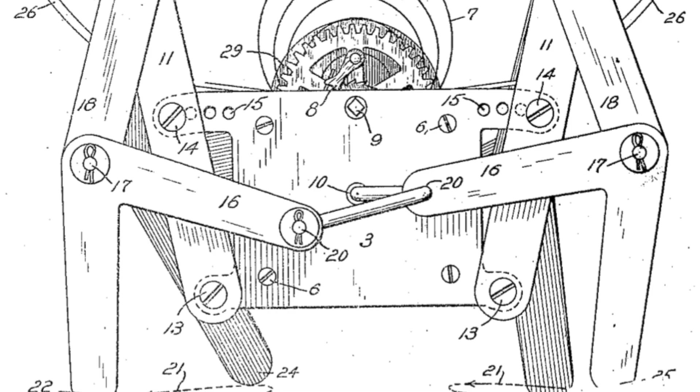Welcome back to part 2 of the video. In this step, we're gonna assemble everything in SolidWorks. So let's open up SolidWorks and do File, New Assembly. Let's start out with our base first. So, base. In this case, mine's a cat.

Let's also insert our crank, ternary link, and the binary link. Binary link, crank, ternary link. Just put them out here for now.

Now we take a look at our Geogebra file to see where all the links go. But since you made the base based on the Geogebra file, it should show up when you show the sketch on the base. So you want to go to the base and show sketch. So it's this. These lines I created previously. You can also see this is where the wheel goes. So we just insert our parts based on these locations.

So let's do the crank first. I'll just hide the sketch for now. So we put our wheel hubs here, and this connects to the other side of the crank. And the crank on both sides needs to be 180 degrees out of phase. And we use the wheel hubs to lock onto the brass tube, so the rotation will be translated onto the other side with the crank with the wheel hub as well.

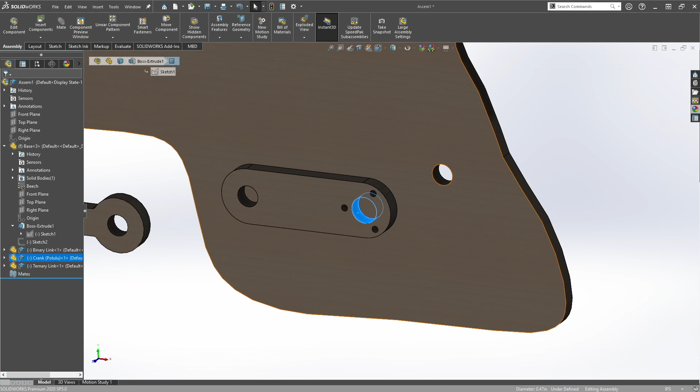So we are using wheel hubs from Pololu, and then the brass tube is 0.25 inches in diameter. So it's these wheel hubs here, 0.25 inches in diameter. Now the 6mm one is for the motor, because the shaft on the motor is 6mm. So for this one, since this is where the brass tube goes, we're going to use 0.25.

Now these hubs will attach to the crank here. So you would do a mate. Let's do a concentric mate. And then also a coincident mate. Just like that. Now these holes have to align to the wheel hub where the M3 screws go.

Let's mate that for the crank. So I select this surface, mate, select where the holes are on the wheel hubs, so they match. And that's it. That's your wheel hub and the crank. And the wheel hubs are threaded, so the screws will just secure on nicely.

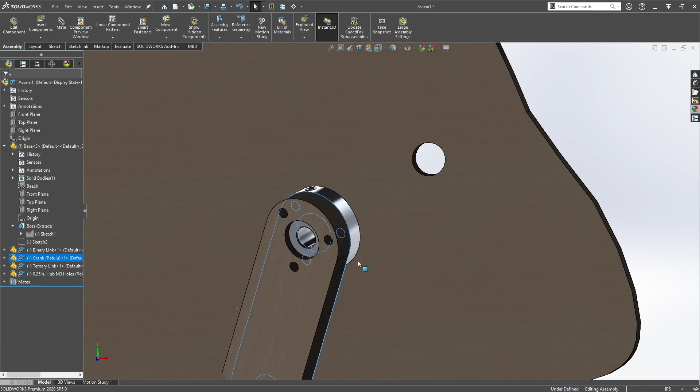Now we want to mate the crank to the circle here. There's two ways of mating. The first way, that's what we went over. You use mate using the mate selection here, and then just select concentric. There's also another method, which is a bit faster.

So what you would do is hold down your Alt key on your keyboard, and then you would drag what you want to mate. So I want to mate this circle to this circle. So holding your Alt key, you drag, and you should see like a paperclip icon on your mouse. And just drag it where you want to mate, and then it'll automatically know, oh, you want a concentric mate. And that's just a really quick way of doing it instead of going through the mate tree.

Now we want to mate the other links to the base. So you know this binary link, according to our Geogebra sketch, this one goes here, and this triangle goes here. So this joint here mates with this joint. Let's double check if that's right.

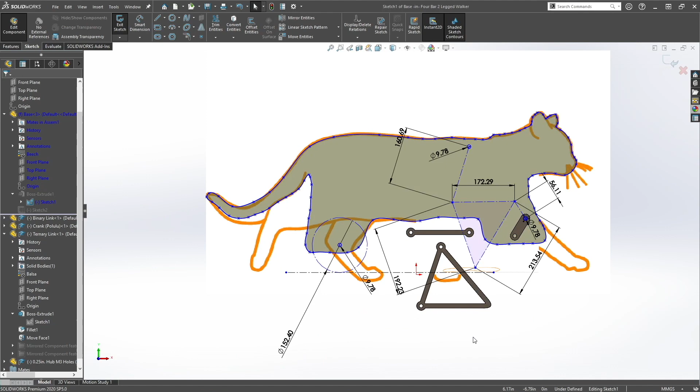Okay, so we know for sure based on that dimension there, this joint mates with this joint. So this joint must mate with that joint. Again, just refer back to your Geogebra file. It might be different from mine. So again, you will use the shortcut to mate this. Hold down Alt key. Do that.

And then let's mate this link here. And then finally, let's link this all the way back up to the base here. Let's just double check. I think I missed this one. There we go.

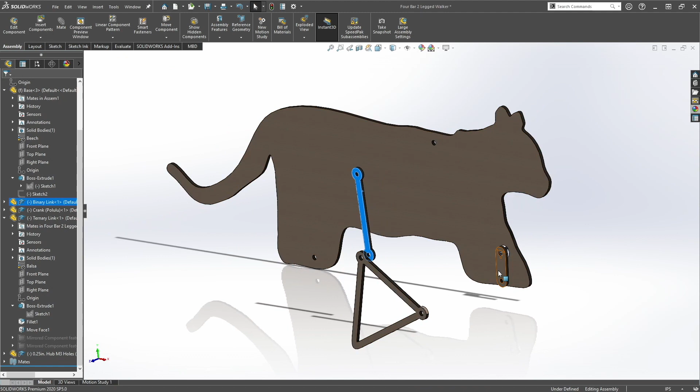So now you want to start mating it so it actually represents a walker, because now we're just testing it to see if the walking pattern and everything we designed is correct. I would say this part is one of the difficult parts, figuring out the spacings between the links, because you can have it here, here, or here. But for this one, we're just going to keep it simple.

We're just going to put the ternary link on the outside, the crank, and the binary link on the same plane. The way you join these links together is using a brass tube in the middle, bushings on the inside, and then shaft collars on the outside to secure it, and then a spacer in between. You leave space for screws here so it doesn't hit against the link. The spacers also create space for the shaft collars. You'll see what I mean after we put everything together.

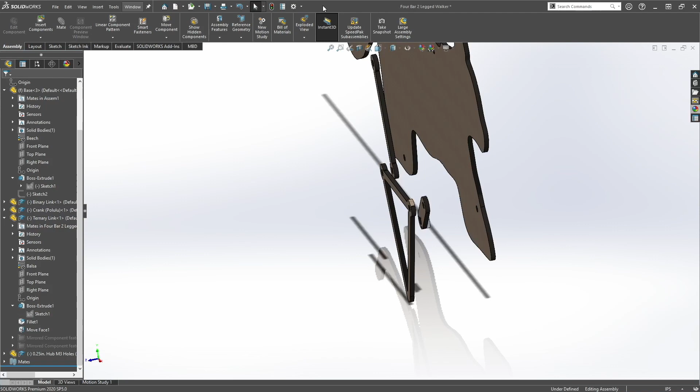So let's put our spacers in there first. We know we need to have one here for sure in between these two links, because if these links are touching, that leaves no room for these screws. So we need to have space here. Oh, that looks off. Let's just copy appearance and paste it.

So let's put our spacer in between the crank and the ternary link. Again, using the shortcut, you press Alt and drag to the circle. You can also do that for edges. So I'll drag this to this edge. That makes it coincident. Drag this to that edge. And that's it. Now you have space for the screws here.

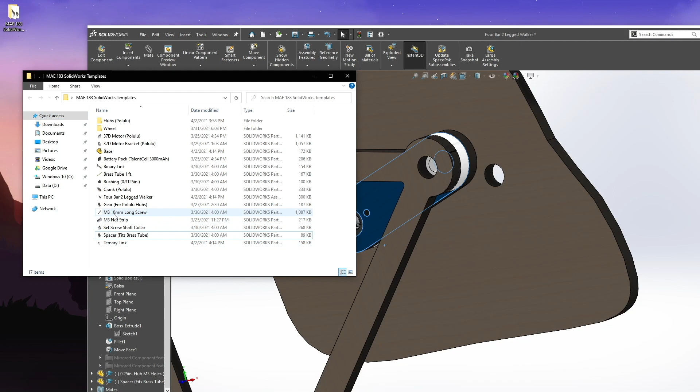So speaking of screws, let's put our screws in, because you want the model to be as complete as possible. So when you actually fabricate it in your future projects, it'll be much faster, much more streamlined. And you can also figure out if there's an interference of any kind. So let's put our M3 10mm long screw. These screws go into these holes. You can also use the Alt shortcut. I just did it manually this time.

Now another tip when mating these repetitive parts: right click the part you want to copy with mates, click next, concentric where you want the screw to be concentric to, and then coincident where you want the bottom face of the screw to be coincident with. So in this case, I want this circle to be concentric to this circle, and then the face to be the crank. And you right click on the mouse. That's it. Same thing here, concentric, coincident, and that's it. That's a fast way of doing it instead of one by one.

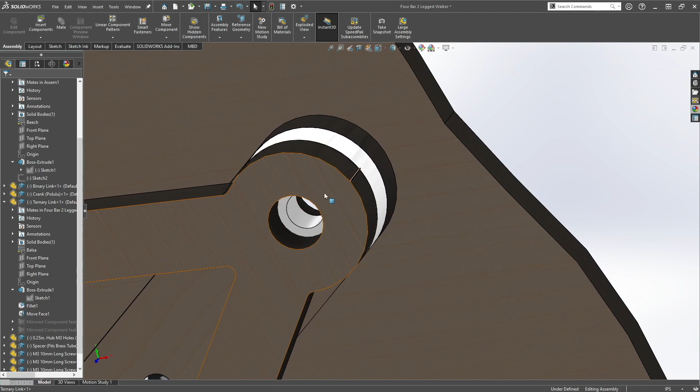Now let's do this joint here. A brass tube will go in here, and then a bushing will go where the wood is. The bushing is also in the template. It's this bushing here. Again, using the shortcut. And then you can also use the copy with mates. So concentric here, then coincident here. That's your bushing.

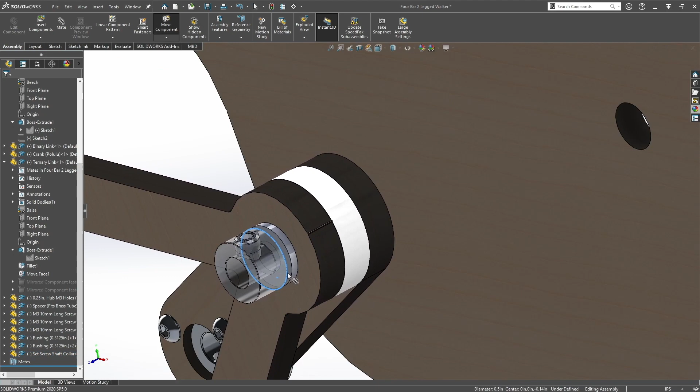This bushing helps reduce the friction between brass and wood. The brass tube will go in here, and it operates more smoothly compared to without a bushing. To keep the brass tube in place, we use shaft collars to lock them on both sides. So let's grab our set screw shaft collar, and let's put them on both sides. Sometimes the shortcut is a bit finicky, so that's why sometimes I like to still do it manually.

Again, you can use copy with mates. Concentric, coincident. And that's our joint. Now let's insert our brass tube down the middle. We will use the one in the templates folder, brass tube, 1 foot. The way we're going to set this up is using one part file for many different lengths on the walker. What I mean is the length of the brass tube will be different for this joint, this joint, and the wheel joint.

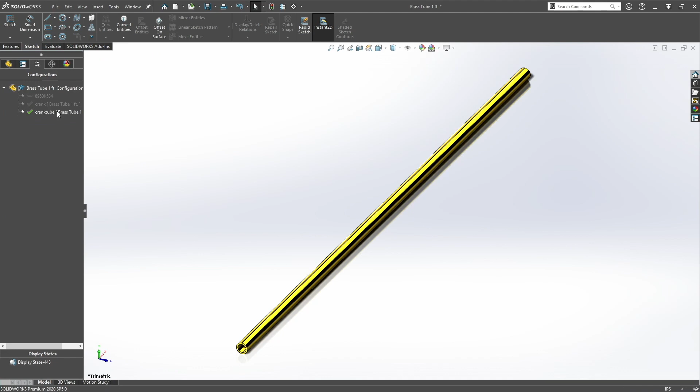To do that, we're going to use SolidWorks configurations. Open up the part: right click on the part, open part, then go to Configuration Manager, right click, Add Config. Let's just say crank tube. Click OK. And then you will save the file. And then mate it to this joint using the shortcut for mating. Alt and drag, Alt and drag.

Now make sure you click on the brass tube, you select crank tube or the one you just created. Right click the mouse button or click OK. You want to go down to your brass tube in the feature tree, and then click on the extrude. You want to edit the feature.

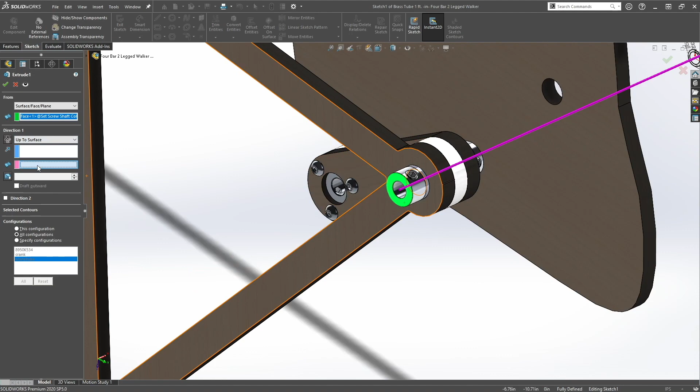And then you want the brass tube to be from this plane to this plane, so the length from one shaft collar to the other. So we want it from a surface, this surface, and click on this one, to this surface. And then specify configurations, make sure it's the one you just created just now, crank tube. Click OK. And that's it.

Now you will do the same for all the other joints. So let's do this joint. So earlier we said we want this binary link and this crank to be on the same plane. So something like this. So you would do the exact same thing here onto this joint here. So let's do that.

You can use copy with mates, but I'm just gonna do it manually because I find that sometimes a little bit easier. Depends on the context. If it's something simple, you can use copy with mates. But if it's something more complex with multiple mates, it can get confusing. So I'm just gonna do it manually.

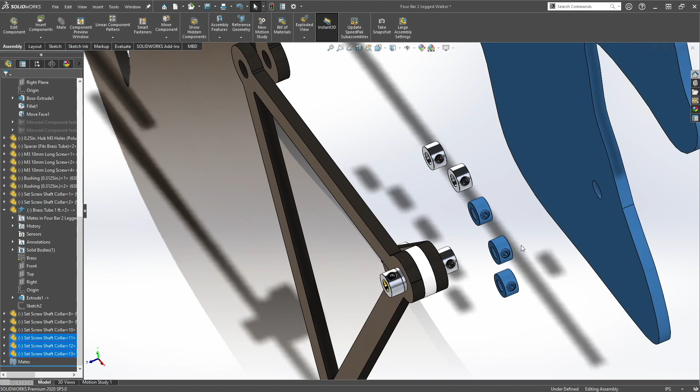So you can copy a part from your assembly. So what you do is press control, and actually let's save our document. Okay, so you press control, hold down control, and you drag the part out. That's how you copy parts, and you can do it as many times as you like. We need that part. Let's put it here.

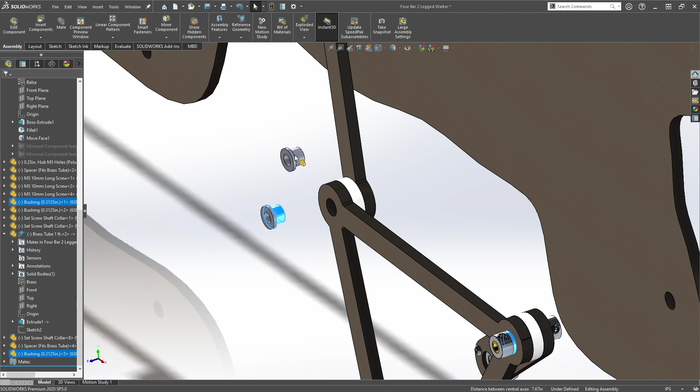And there you go. Actually, we forgot one step. We forgot to put the bushing in there. So let's do that again. You see it alternate between the shortcut and the mate selection. It's up to you. It's based on our workflow.

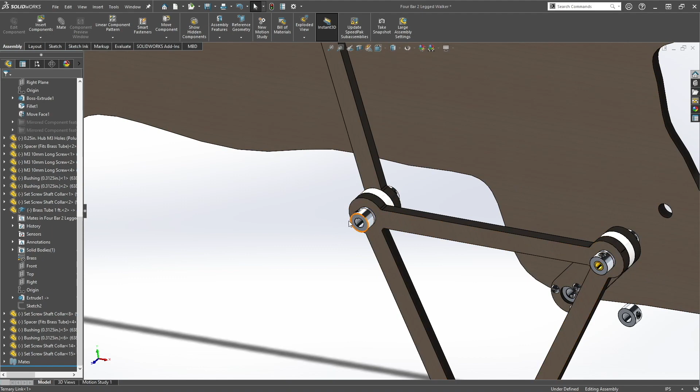And that's it. Just missing a brass tube. So let's copy this brass tube since the length is the same. So we don't need to do any new configuration or anything because the length of these two brass tubes are the same. And there you go. That's how the joints are supposed to look like when we fabricate them.

So you always put a bushing where the wood is, and then shaft collars on both sides to secure the brass tube that goes down the middle. So now we want to figure out the spacing for this, the leg basically.

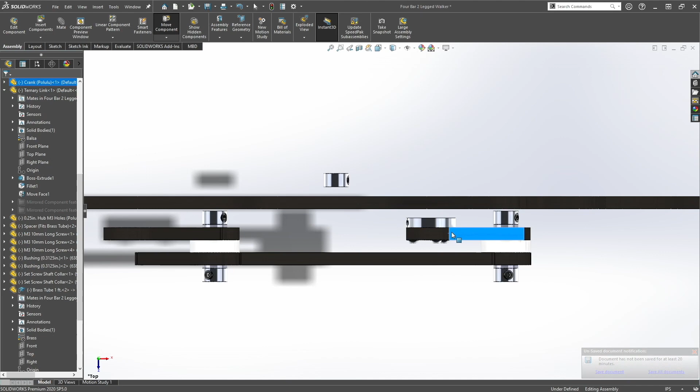So it looks like if we make this coincident with the base, the shaft collars will hit the base. So we might need to add a spacer here to give the shaft collar clearance. So it'll be two spacers here and one spacer here. So let's add our spacers.

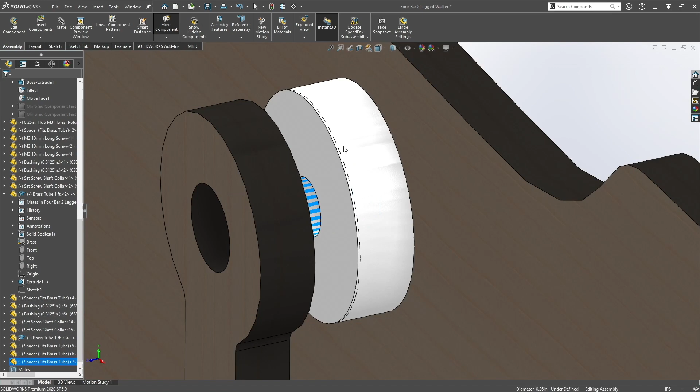And then same thing here, we need a bushing. And also bushings on this side and that side.

So you can see here that the distance is not exact because these spacers are 0.25 inches thick, but this wheel hub is not. So you can solve that when you're actually fabricating by adding like a washer there. So it increases this distance to make this come out a little bit.

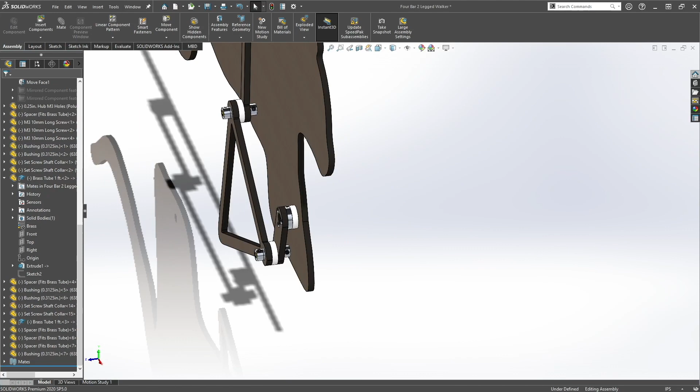Let's add a bushing here as well, and here as well, and then also here. Flip this mate. Let's do copy with mates. Concentric, coincident, and then click OK.

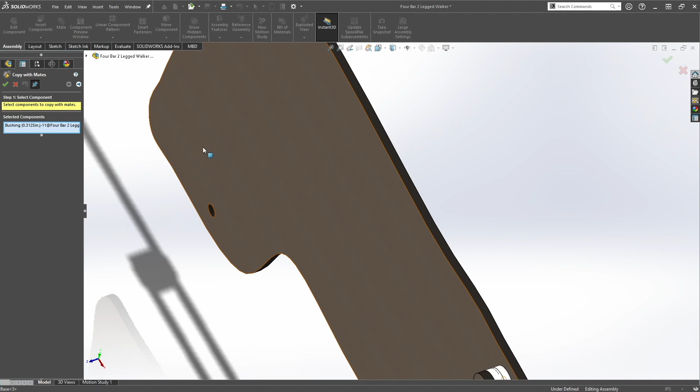Now for this one here, the reason why the flange is facing this way and not this way is because when we mount the wheel, the spacer is going to go directly onto the base, and you don't want the flange to protrude out. So I'll show you what that means in a second. Let's just put it on this side first. So you see here it's flush because we'll be putting a spacer on top of it, and we don't want the flange to come out.

So now let's put our wheel in. So it'll be in our templates, wheel, and it'll be the 6-inch wheel. And then we need the wheel adapter because the diameter of this is 1 inch and this is 0.25. So this will help us attach using the brass tube and using the Pololu wheel hubs. And then we can insert these nuts and screws later on. Let's just put it in here first.

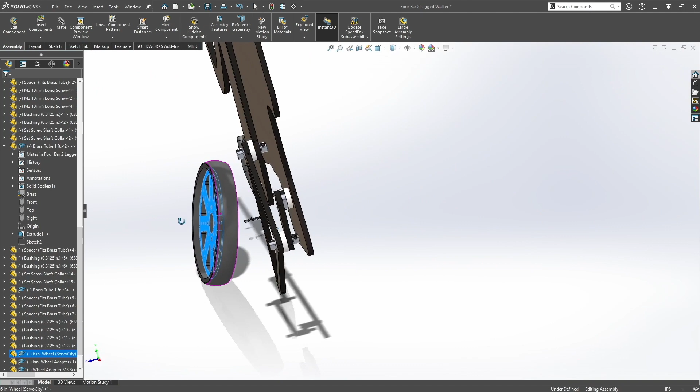So the way we're going to mount the wheels is we're going to put spacers because the wheel's concave. So when it sits flush on the base, it doesn't reach the middle. So what I mean is like this. There's a gap here between the base and the wheel when the wheel is actually touching the base. So to fix that, we use spacers again.

Let me just delete the mate. Again, hold control, and just drag it out. Just one more. I think we need 2. So let's assemble the wheel first. So first, let's put on the adapter.

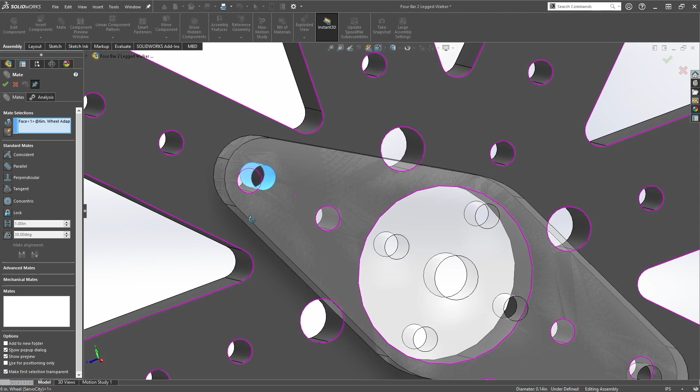These holes should align to one of these holes on the wheel, and that should lock the adapter in place.

So you can ignore these cutouts because you could put a wheel hub there, but we don't need to because these wheels are freely spinning. You don't need it to lock onto the brass tube. So we can just directly put this onto the brass tube and then put a shaft collar on this side and then a shaft collar on this side, just to prevent the wheel from going left and right. Again, this will be more clear once we assemble this. So let me assemble this right now.

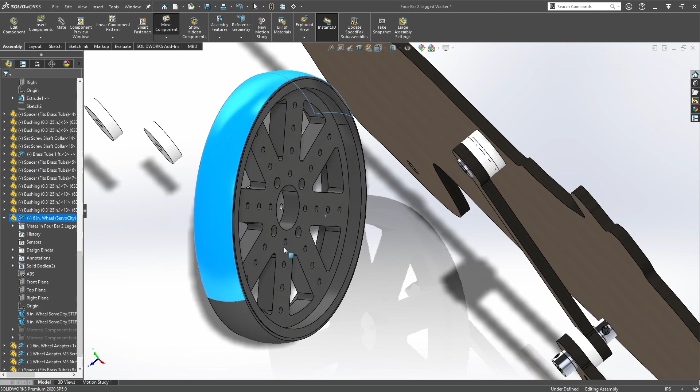And looks like we need to add a few spacers so the ends of the wheel don't touch the base when it's attached to this circle here. So let's put these wheel hubs there. I think we need another one. Yeah, so it looks like we need 3 spacers for it to protrude out. So now let's put this here.

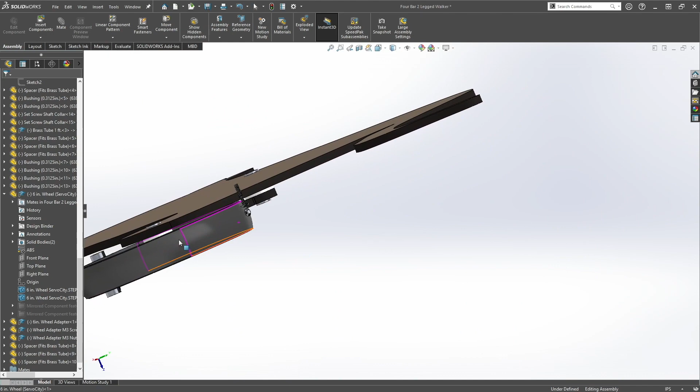And then you want to mate this spacer to the base. And there you go. That's the wheel. So the spacers are to keep the wheel from rubbing the base. And then now you just put a shaft collar here and then one here. But let's do that later. Let's insert the screws first.

The screw concentric to this circle here. And then make it coincident with the top of the screw. Just like that. And let's do copy with mates. Concentric, coincident, left click, right click, sorry. And that's it. Let's put the nut over here.

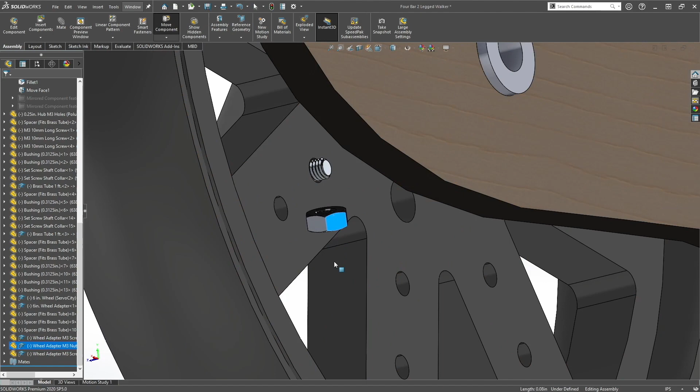See the Alt shortcut mate? Sometimes it could be a little bit buggy, so let's just do it manually. Concentric. Then you want to select this face and this face. And that's your nut. Now let's just copy mate. Concentric here, coincident here, click OK, and that's it. That's your wheel with the nuts and screws on it.

And let's do save. File, save. Save all, rebuild and save. So at this point, we have finished one side of the assembly. To do the other side, we just use a SolidWorks function called mirror components under linear component pattern. Before we do that, we need to find a plane for all the components to mirror on. So the way we do that is click on Reference Geometry, Plane, and you select this face.

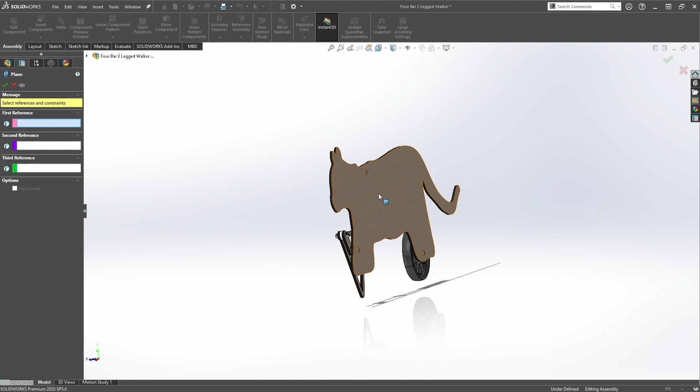And then let's make our walker 6 inches wide. Again, you can use your own designs. You can choose however wide you want, but for this particular walker, I'm going to do 6 inches. So this is the mid plane, so I set it as 3 inches. Once you have your plane, you want to go to linear component pattern and then mirror components. So you select your mirror plane and then you select the components you want to mirror. So let's select everything.

And then you want to click next. Click the first one here, hold down shift, click the last one. Make sure you select create opposite hand version. And just double check to make sure everything looks correct. Click on next. So on this page, you want to click create new derived configuration. So that way we don't create new files for all the parts. It's all kept within the folder and organized within the folder.

And then let's create a prefix. Let's just say left side. After that, click OK. And now you have a complete mirror of the right side. But if you notice, once you start moving the links, let's fix the base first, they are moving in sync, and you don't want that because you want the cranks to be 180 degrees out of phase.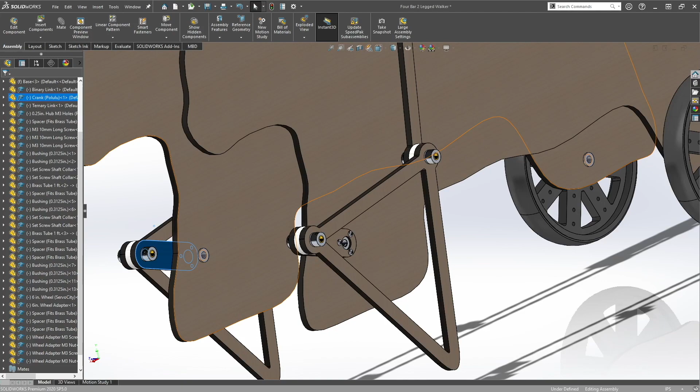So to prevent the mates from synchronizing, you'll want to go to here in your feature tree, mirror component, right click and dissolve mirror component feature. Click yes. So now when you move the cranks, they are moving independently. So before you move forward, you want to double check all the parts that they're mated correctly. Sometimes the mirrored component feature doesn't mirror things correctly. So you just want to double check.

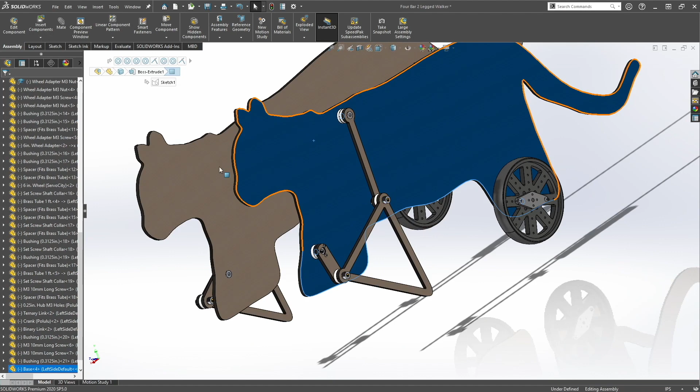So at this point, you will have two bases that are moving freely. If they're not, make sure you right click and click float. So you see this one's moving freely, this one's moving freely. So now we need to mate these two bases together so they become one rigid body. And the way we're going to do that is by using these two holes, this one here, and then also these two holes up here to align the two bases together. So let's do that.

So once you have done that, you can see now the whole body moves as one rigid body. The only problem now is that these two bases are not fixed in distance, so this one can move freely. We need to set a distance for this, and the distance we set earlier was 6 inches.

So let's mate that. Click on this one, distance. Select the other face with the other base. 6 inches.

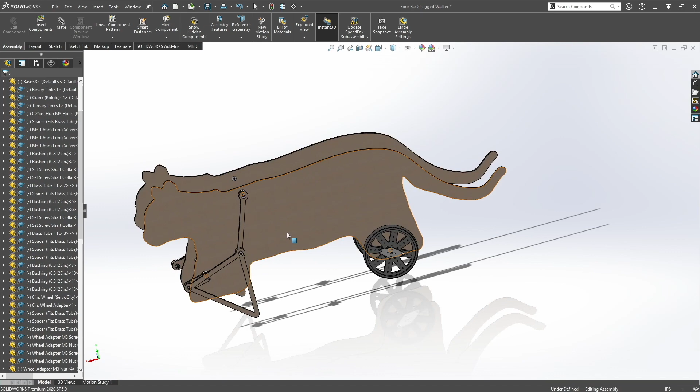So now it is completely defined. It's always a good habit to save as you go, so let's save.

So now you want to insert brass tubes where it's missing - the crank shaft here, wheel, and the top pivot. Again, we're going to use the configuration method. You can also do it manually by using the ruler and measuring a distance from here to here, then use that distance to create another brass tube that goes through the crankshaft. But I'm just going to use the configuration method.

So let me get the part, control drag. Let's make this brass tube here. And then obviously it's not long enough, so we need to make a configuration for this length.

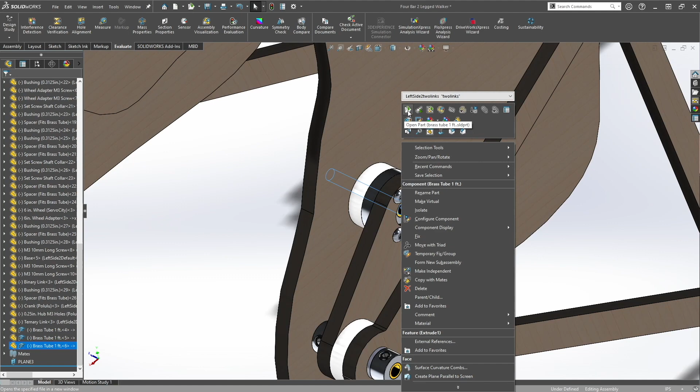So open, right click and open, add new config. Let's name it turning crank. Click save.

And now you just want to edit the brass tube. Make sure you select the configuration you just created earlier - in this case, mine is turning crank. And then you want to edit this part. So right click on the brass tube, edit part, and then edit the extrude.

So we want it from this surface to this surface. Again, make sure the arrow is pointing in. And then specify configuration. Select the configuration that you just made, and then click this button here. Let's rebuild it.

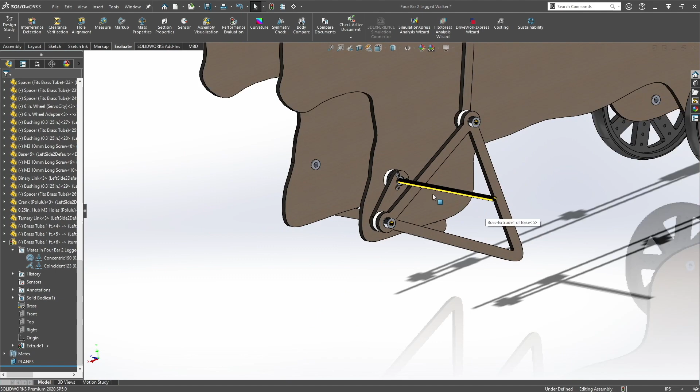And that looks good. Now sometimes when you do this, some of the brass tubes will be sticking out in the wrong direction. So for example, this might be sticking out like that, or this one might be sticking out like that.

What you gotta do is just go in and remake them. So let's say this one's sticking out in the wrong direction. You want to select the brass tube and look down at your feature tree, then delete the mates and just remake them. The same thing goes for any of these that are facing the wrong direction.

Because when you're doing mirror assemblies, sometimes the brass tubes, the little parts get lost in the translation. So I'm just gonna remake these. Same for this one - let's delete these mates and remake them.

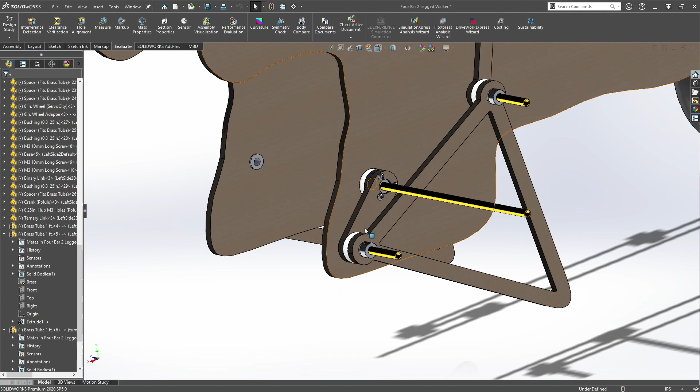See, sometimes it'll be like this. So what I just did was click rebuild, and then these just went in the wrong direction. So again, you just want to redo it. Let's do this one first - right click and flip mate alignment.

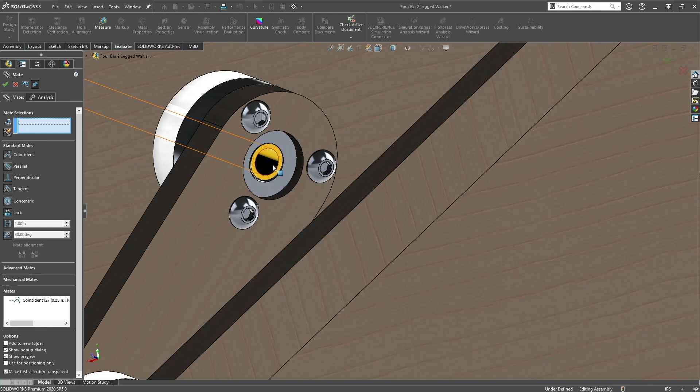Let's try flipping the mate alignment in this one too, and then click rebuild. Okay, let's redo it. And then let's click rebuild again. And that's fixed.

So if you meet these errors, just redo the mates. What I would do now is click save, save all.

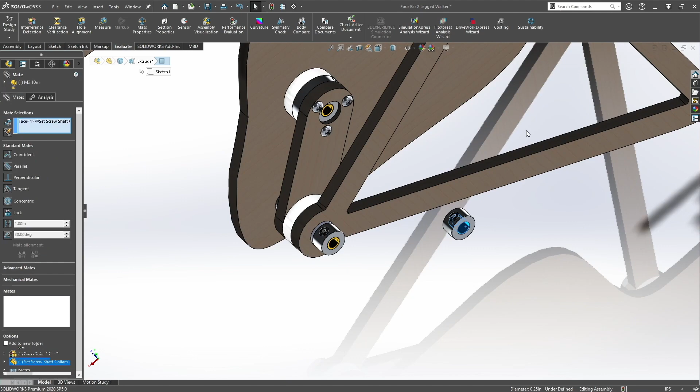And now you want to do the same thing, but one brass tube here and one here. So control drag. But before we do that, we know we need a shaft collar here and here. Let's get one here, and you want the same thing for the other side.

So now we know the distance we need for the brass tube. Let's make this brass tube. And then, as you can see, it's not long enough because this one was the brass tube that was here. So again, let's do the configuration method, or you can do it manually using measure and then creating a duplicate part that has the correct measurements.

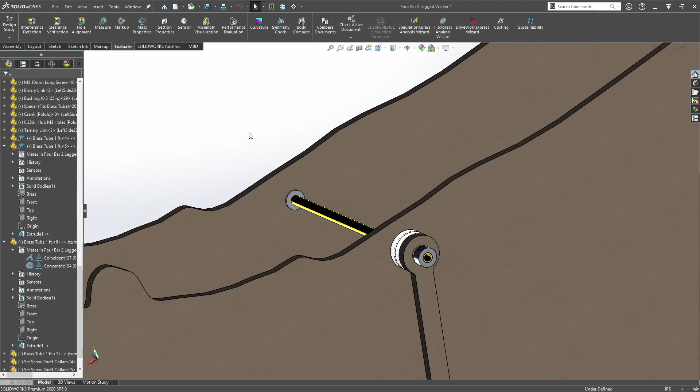But let's just do the configuration method. Let's add a configuration, let's name it top pivot. Again same thing - edit the part, the extrude. So let's rebuild.

This face to this face. Oh, we forgot to select top pivot. Okay, now we can edit. Specify config, the one we just created just now for the top pivot. And then click this button here and rebuild. Looks good.

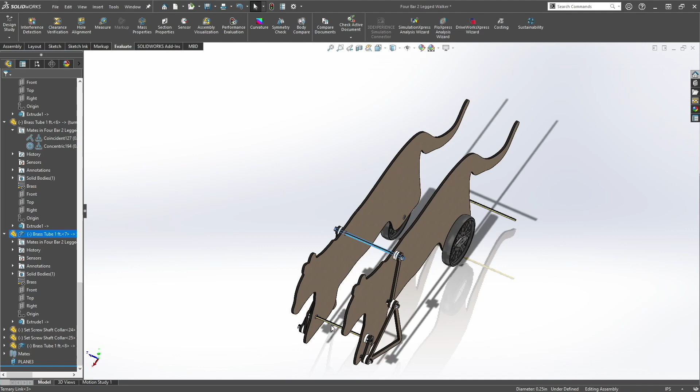So now we want a brass tube for the wheels, and again we need a shaft collar here and here. So again, control drag, same thing - we're doing the same thing as these tubes here. So I'm just gonna speed through it real quick.

New config, wheel, save. Make sure you select the wheel config. Then let's mate it. Oh, before we do that, let's add the shaft collars.

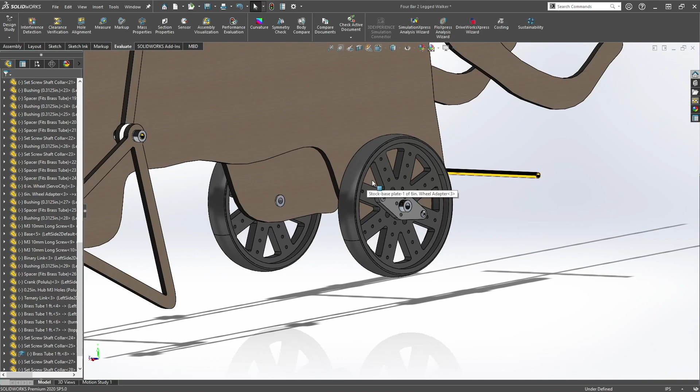Again, for the other side. Now let's insert the brass tube. Then again, you want to edit, to extrude. Specify configuration, make sure it's the wheel. So from this surface to this surface on the other side.

And that looks good. You are about 70% done. So now would be a good time to save.

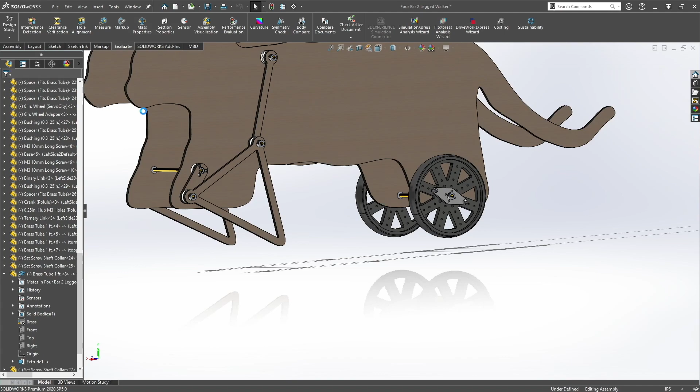We also need shaft collars on the insides too, so let's insert those. Just do copy with mates. Actually, no, let's mate one first. Now we can copy with mates. So concentric, coincident, right click. Same thing here. Concentric, coincident, then right click. Do that again.

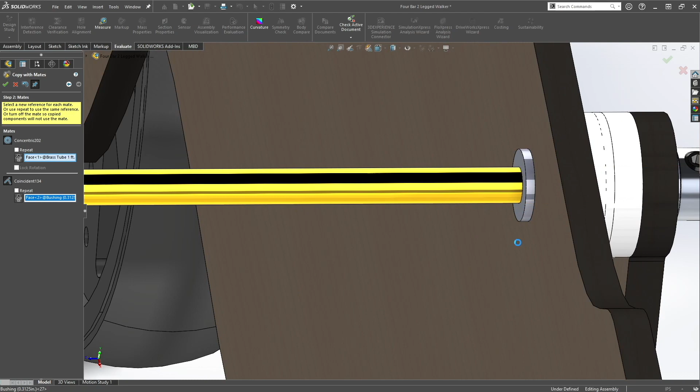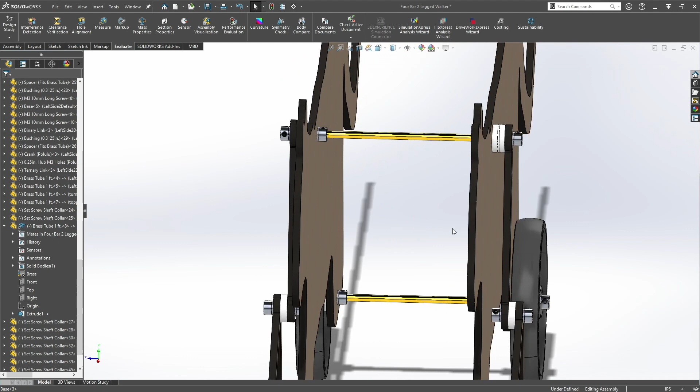Down here on the wheels too. Let's flip this. There we go. So now we have shaft collars here, shaft collars here, here, here, and here, and we need one more here. And that's it. And click save.

So the next part will be inserting the motor, the gears, and the battery to make this more complete. But first, let's make sure the cranks are at 180 degrees out of phase. Let's do a parallel mate, and then let's flip the mate alignment. So now they're at 180 degrees when you rotate them as well.

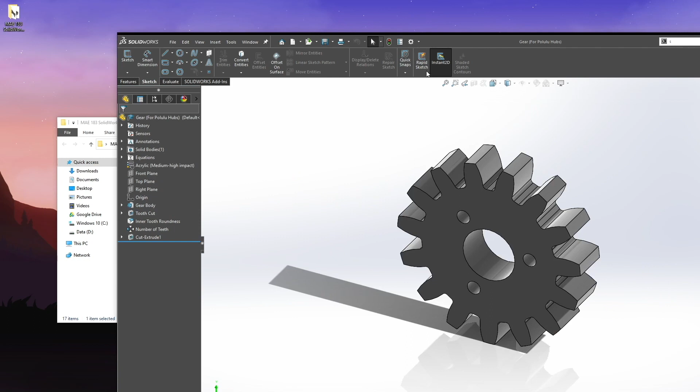So now let's move on to the gears and the motor. We're going to insert the gears, and first we gotta size the gears and know how big it is on our walker. Use the gear template given in the Google Drive. So gear. For this project, we're just gonna keep it at default. In the future, if you need to size the gear or change the diameter or the teeth, you can do it here. You can manage the equations.

For example, let's say I want 20, and then 3 here. Click rebuild, and then you can size your gear however you want it. So for now, we're just gonna keep it at default.

What we want to do is measure how big the gear is. I'll put the circle around here because we want to leave space for the other gear to mesh in properly. So let's see, it is about 37.45 millimeters in diameter. So what you could do is click on this entity and then press Ctrl C to copy the sketch.

And then you want to go back to your assembly, open the base, and then do a new sketch on this face, and then press Ctrl V. Let's give it a dimension, 37.45 millimeters. So that is our gear.

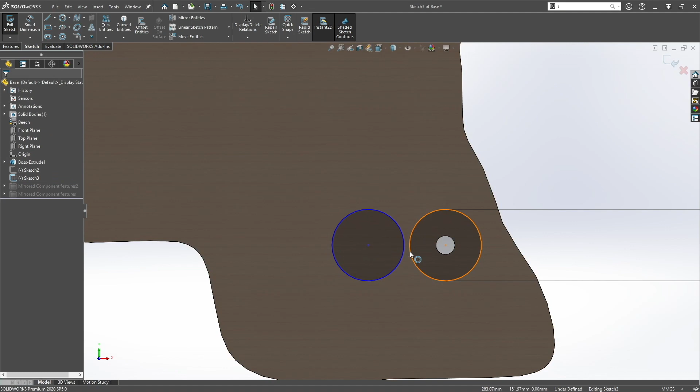First, let me add a dimension here. And you click tangent. You hold down Control and click the two entities, and then you click tangent. So now we know this is where our gear is gonna be, one on the crank and one where the motor is going to be. The reason why we make these sketches is also for later—it's easier to mate the gears and to mount, and use this sketch to mate the mounts and know where the mounts should be.

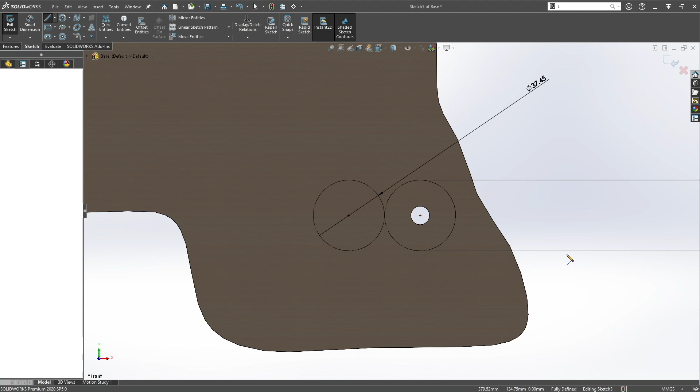So let's make these sketches into a construction circle. And then let's make these 2 points horizontal. Let's draw a center line or horizontal line. Make this horizontal, just so we can reference back to it later. Because we don't have anything here that's horizontal or completely straight—it's all rounded or at an angle. So this is helpful later when we make parts.

Let's just fix this so it doesn't move around. And then you want to exit sketch and then save. So now we have a horizontal reference frame and also circular holes, so we know where to mount our gears and motor.

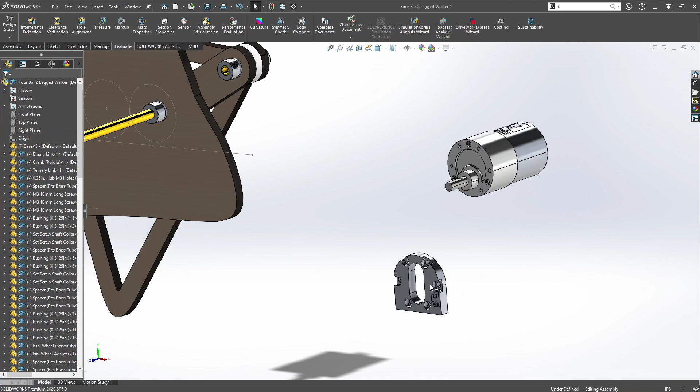Now let's insert our motor and motor mount, the motor bracket. Let's assemble this, mate this. Make this concentric to this, coincident with these two faces. And then mate the holes correctly, because this top part should be rotated down here. So let's make that. And that's the motor.

The Polulu motor bracket actually comes with screws, so we won't put it in here now, but when you guys get the physical model, there'll be screws for each of these holes and also screws down here. So when we get the motor mount, it'll come with 9 screws for each of these holes.

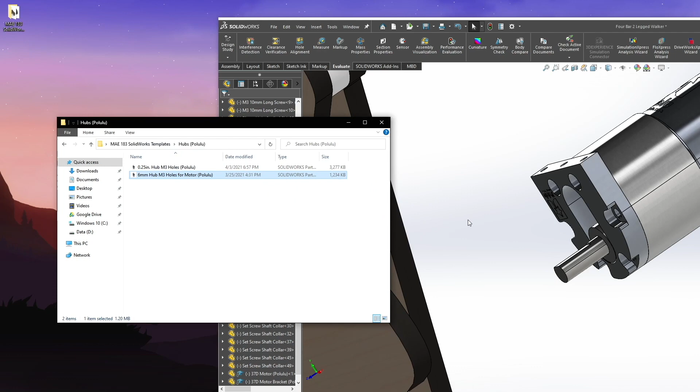So now let's insert our hubs. Since this is the motor, this is the shaft for the motor. The motor shaft is 6 millimeters, so we use the 6 millimeter hub. And let's make these two.

No, it's the right direction. Let's make this face with that face.

Let's insert our gear. So the gear will go on the wheel hub. Let's make that concentric to the wheel hub, and then make these faces coincident. And then let's line up the holes—one is enough.

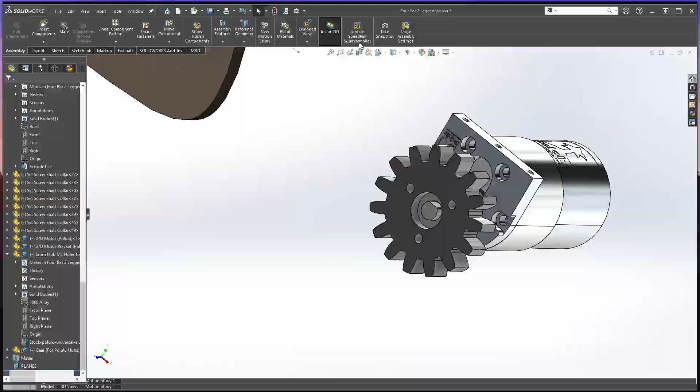So now you have your gear, your wheel hub, the bracket, and the motor. We want the model to be complete, so let's add in our screws too. These screws go in the motor hole, the gear hole, and screw onto the wheel hub here, so it secures the wheel hub and the gear. Let's just make that real quick.

Concentric, and then make sure these two faces are coincident. So just do copy with mates. And now that is where these holes come into play, so we can use the holes to mate this at the correct location. Since these are all concentric, let's just choose the hub surface, click mate, and then we want the motor on this circle—make sure it's concentric.

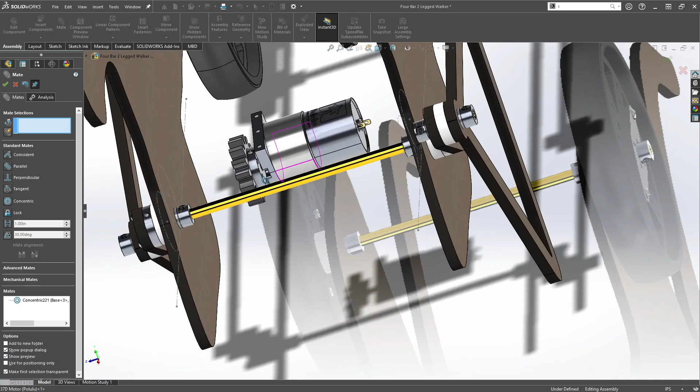So now that is where we're going to put our motor with the gear. Since this is not oriented correctly, we're going to use this horizontal line to orient the motor. Click on this face and the horizontal line, make sure it's parallel, and click OK. Now the only motion is this motion.

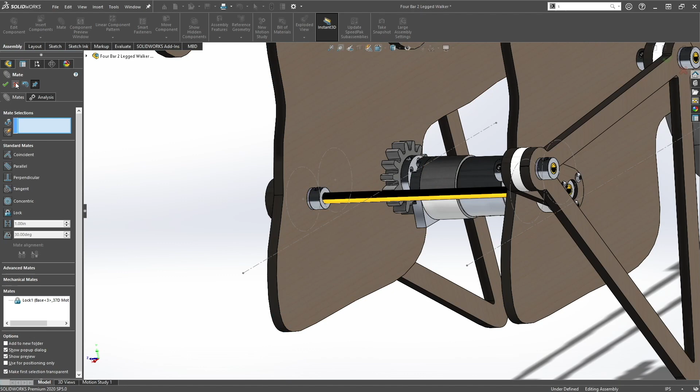But what we could do is just click on any face—let's click on this face, click mate. You want to click this symbol, the lock button, and select the base. What this does is it locks the motor and the motor mount at a certain distance to the base, so now it does not move. It will move with the whole body.

The next thing you want to do is insert the other gear on the crankshaft. So let's just control-drag. We're not going to use this wheel hub—we're going to use the wheel hub that's for the brass tube, the one that's 0.25. Then we're going to do the exact same thing as here with screws and the wheel hub mounted to the gear.

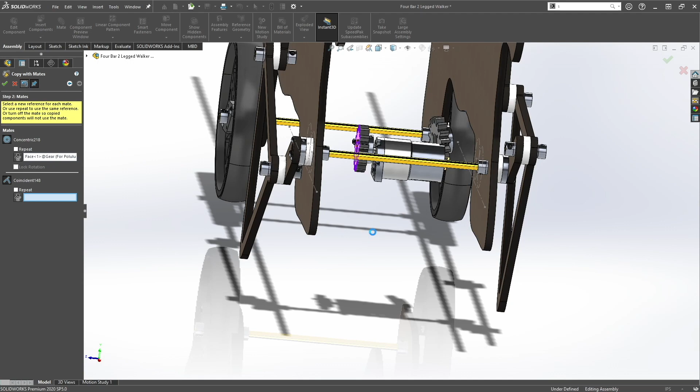And then we want to mount this to the crankshaft here, so let's insert some screws—we can just use copy with mates. Let's mate this onto the crankshaft, and then let's make these two on the same plane, the two gears.

We want to check if it's meshed correctly. To hide an object in your assembly, just hover over it and click tab. So we can see it's not meshing correctly because it's way too tight—it's touching into the other gear. So we want to separate these two circles a little bit further, or increase the diameter.

Edit sketch. Let's just increase it to 30.

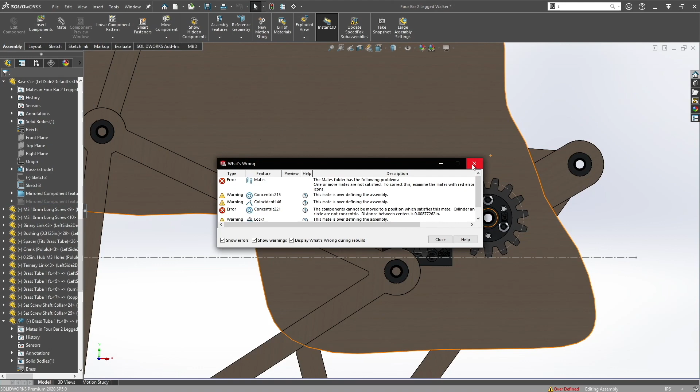Looks like it's showing errors here because we locked the motor to the base already, so let's unlock that first. Let's suppress this first.

Let's increase the diameter. Oh yeah, I shouldn't do 30, it should be bigger than this, so let's do 40. And it looks like, yep, that looks better.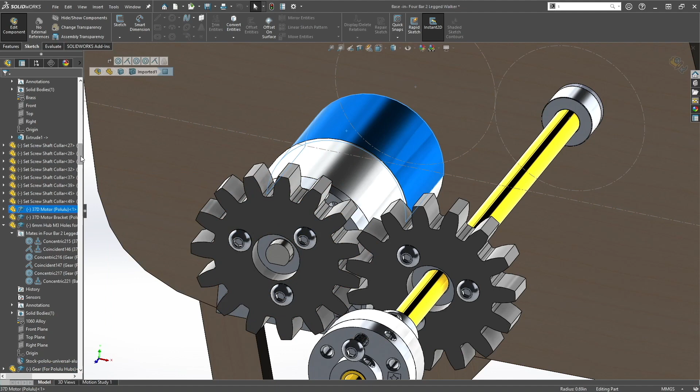So just make sure you unlock the motor mate to the base before you're doing this, because if it's locked in, it'll be conflicting mates. Because you're telling SolidWorks that this gear should move over to the left, but there's a mate here that's locked into the base. So just disable the lock, and then after you're done, just lock it back up again, so the motor doesn't go left and right freely.

And then to show the part that you click on the screen here—show hidden components, you want to highlight everything, click on it, and then click exit. So now this won't move because we relocked it earlier. Okay, the gears will move.

We will make these correctly with gear mates later, but for now, let's just make the motor base here, because the motor is floating in midair right now. So to make the motor base, we're going to use this—insert components, new part.

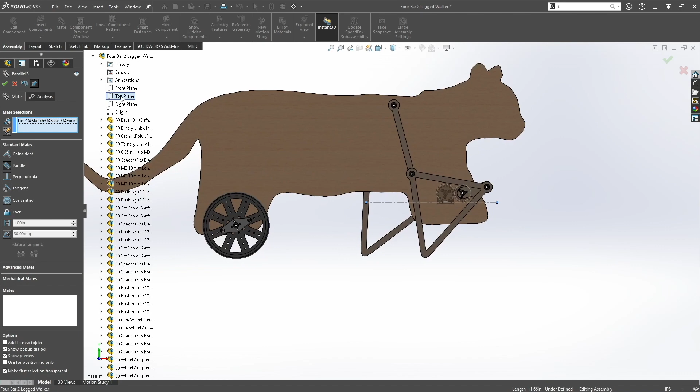But first, let's make our walker—let's make this line horizontal. So let's float our walker so it moves freely. Select this line, click mate, and let's mate it to the top plane, parallel. It'll just make our drawings easier later. And then let's disable that for now—suppress it—and then let's fix our walker.

So let's insert new part. Click anywhere on the screen, scroll down, you want to edit part. And then let's hide this base because we can't see the motor.

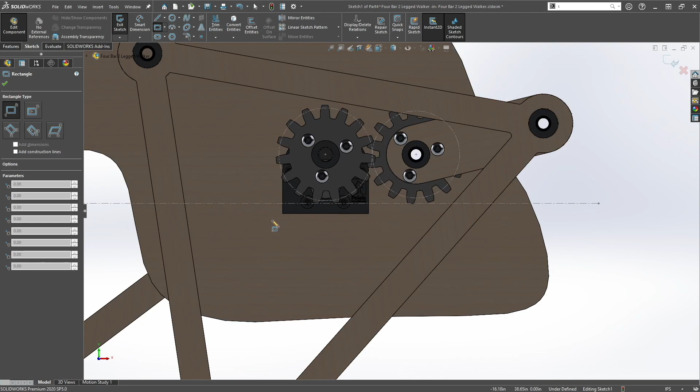So now we want to draw a box down here for the motor mount to go on. Sketch, click on this face, let's just draw a rectangle. It'll be 0.25 inches thick because that's the thickness of our wood. And then we want the base to be 2 inches wide.

Next, we want this to be up here, so control-click on this edge and this edge, and make it collinear. Then next you want to align this so it's in the middle. So if you just hover over this line, you'll find this midpoint, and then while holding down control, hover over this line, and you should see the midpoint as well. You want it to be vertical, so now it's in the middle.

And next you want to extrude this. So, our width of our walker was 6 inches—let's just show.

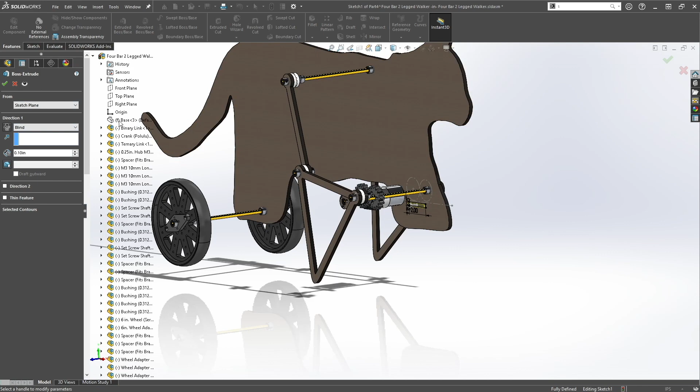Extrude 6 inches. Click OK. And then we want the appearance of wood, so let's just copy appearance, paste onto the part. That is your motor base. And now's a good time to save. Save internally.

And then we also want to lock this motor base to the main base, so it doesn't move around. So mate, lock to the base, and then click OK. So now it won't move around. We can hide these sketches.

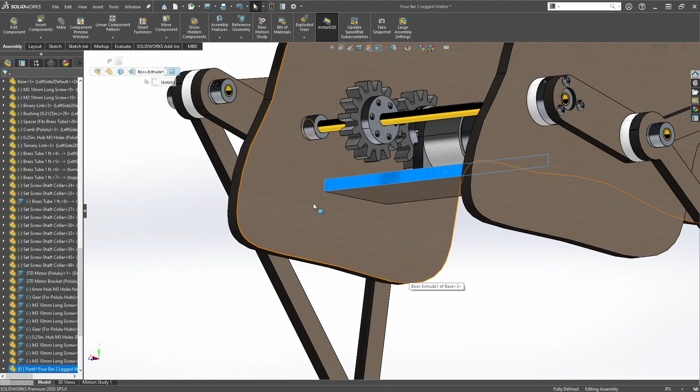Then now we want to mount something like an L bracket so we can secure the actual motor base during fabrication. Because right now it's just SolidWorks, but we want something to actually hold it in place when we're building it. So for that, we're going to use something called a nut strip. These nut strips, they are threaded, so we don't need nuts when we use an L bracket. We just directly screw our screw onto the nut strip.

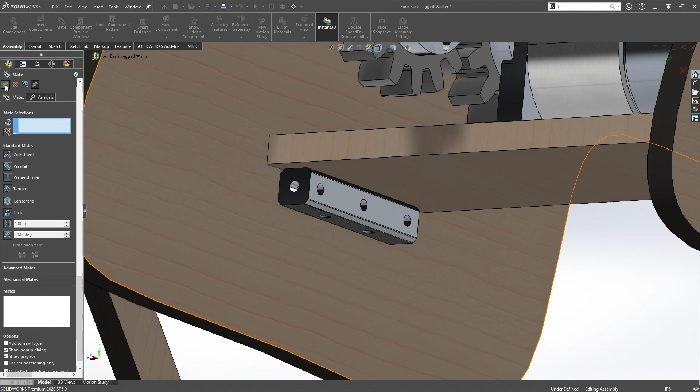So we just want these on the bottom here. So I'm gonna make that real quick. And then make sure it's in the middle. So I think it was, let's try 2 inches in the other direction. Oh, it's 0.2 inches. And same for the other side. So that is our L bracket slash nut strip.

So last thing we're going to do is just make these holes on the base, because when we're manufacturing them we use laser cutters, so we can cut these holes so it's more precise when we mount these L brackets. We don't need to drill holes or insert screws or tap them. So let's create the hole for the motor mount first.

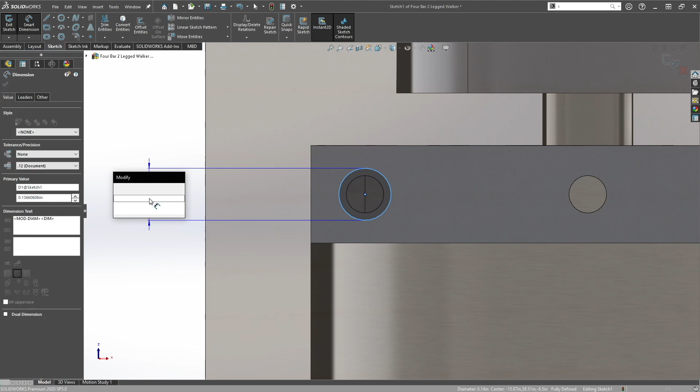Let's make this transparent. And then we would do sketch, circle, select a plane. So let's just select the base, the motor base. And then our holes should be 3 millimeters. Make sure you change your units, because we're using M3 screws.

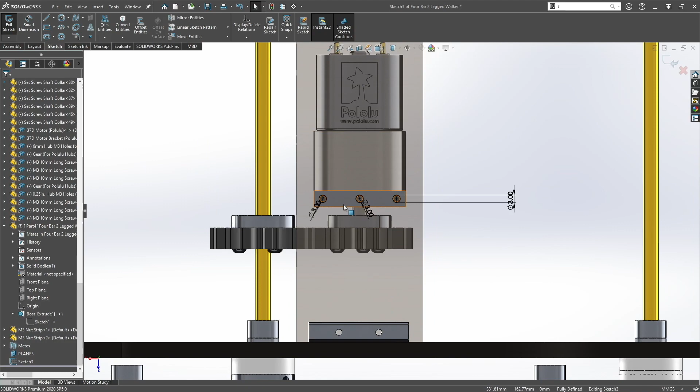And same thing for these two holes. 3 millimeters, 3 millimeters. So now you want to create holes for these nut strips as well. So again, it's 3 millimeters. So now you have all these holes that are gonna extrude cut into the base.

So what we want to do is click on assembly, assembly features, extruded cut. And then you want to do through all, and make sure your feature scope is propagate feature to parts, unclick auto select, and you just want to select the motor base. That's all you want to cut through.

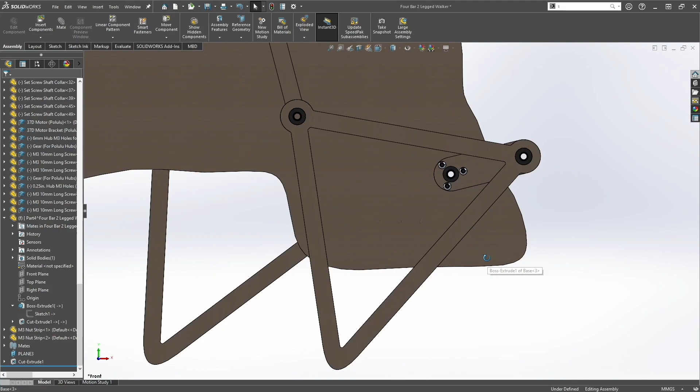And let's make this not transparent. So now you see the holes made for M3 screws when we use the laser cutter to cut through them. Now you want to click on File, Save. So now we want to create holes for the M3 screws so they can screw onto the nut strip. So we make the holes on the base. So let's make this transparent first so we can see the holes on the M3 nut strip.

Sketch, click on this plane, circle, and then it's 3 millimeters. Same thing like what we did for the motor base. Click on assembly, assembly features, extruded cut. You want to select through all, both. Uncheck auto select, and you just want to select these two bases. Change transparency. Now we have the M3 holes for the nut strip that secures the motor base and the base.

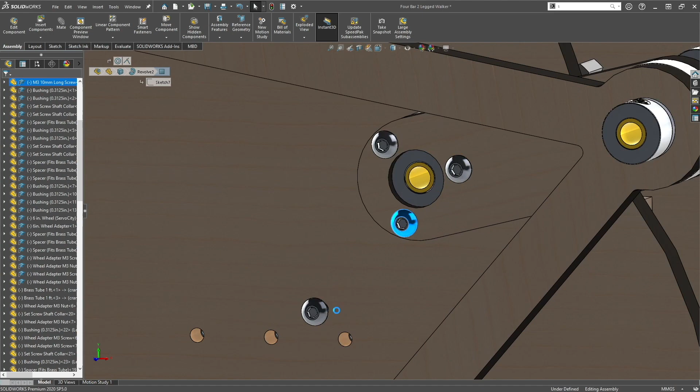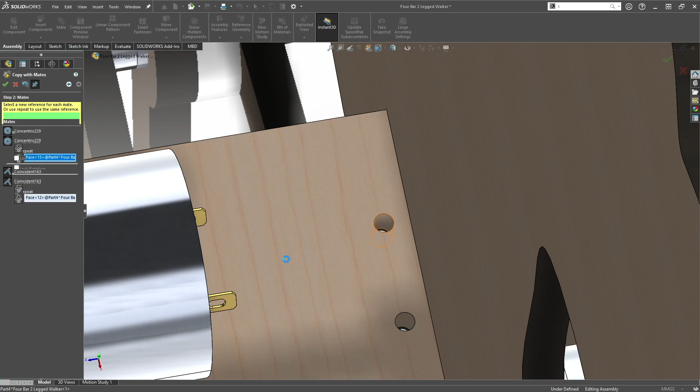To be complete, let's insert our M3 screws onto the nut strip. Just mate this to the nut strip here. Let's do copy with mates. Same for the other side. Let's flip the direction. Same for this. And also the top. And the bottom.

The motor bracket will come with these screws. So you can choose to use the screws that came with the motor mount or the M3 screws that we're going to purchase.

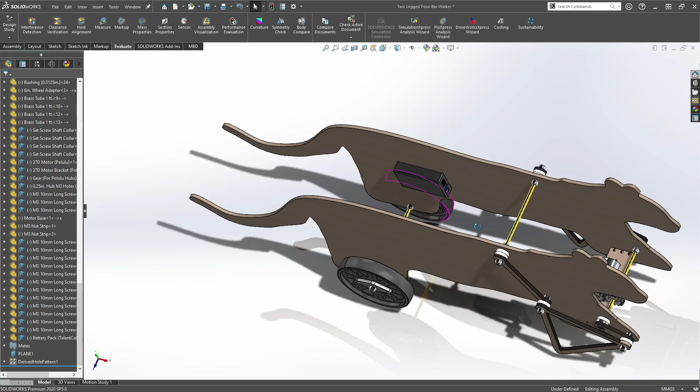So the last thing we want to insert is our battery. It's called battery pack. And then you can put this anywhere you want. I'm gonna put it right here. And then I'm just gonna lock this to the base so it doesn't move around. And now you want to click save.

So that concludes our second part of the video. The third part, we're going to focus on making a motion study. Basically, that is just an animation based on our walker here.